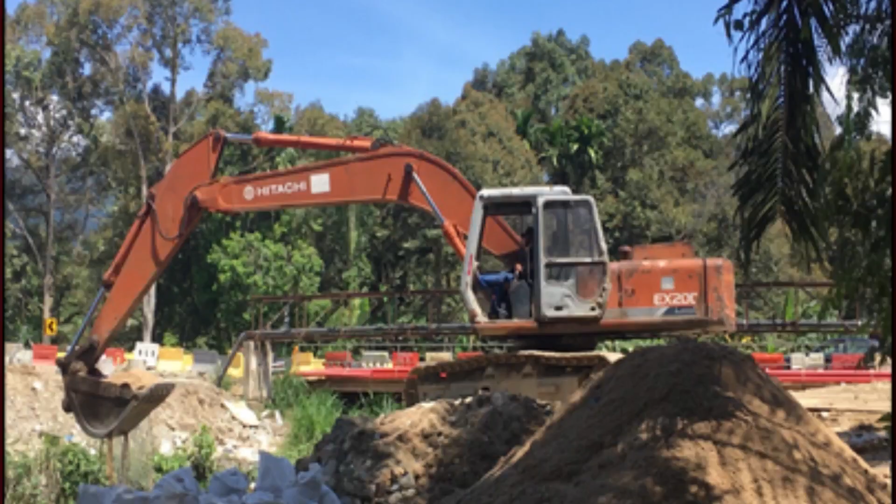The current project is membina jambatan baru merentasi Sungai Korbu ke Kampung Kenang dan lain-lain kerja berkaitan di daerah Sungai Siput Perak. Okay, let's go to weekly summary.

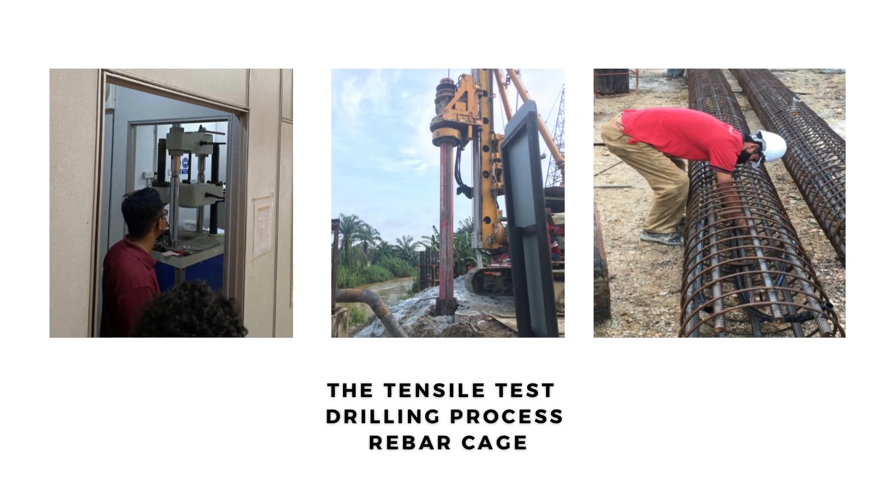First, we have the tensile test for steel. This test helps to determine tensile strength, yield strength, ductility, and reduction of area. This test is one of the most common tests for steel in order to follow the specification of steel from the JKR.

Then, the construction is undergoing the bored pile stage, which is the drilling process. This process will take 2 or 3 days to finish. After finishing this process, we install the permanent casing. After we install the permanent casing, we install the rebar cage into the 30-meter drill hole. We also install the pipe of the sonic logging test and also the Y-jack test at the rebar cage.

After all is done, we will do the concreting part. When the concrete mixer truck arrives, a slump test is made at the site in order to measure the consistency of fresh concrete before it sets. This slump test must be shown between 125 mm to 175 mm.

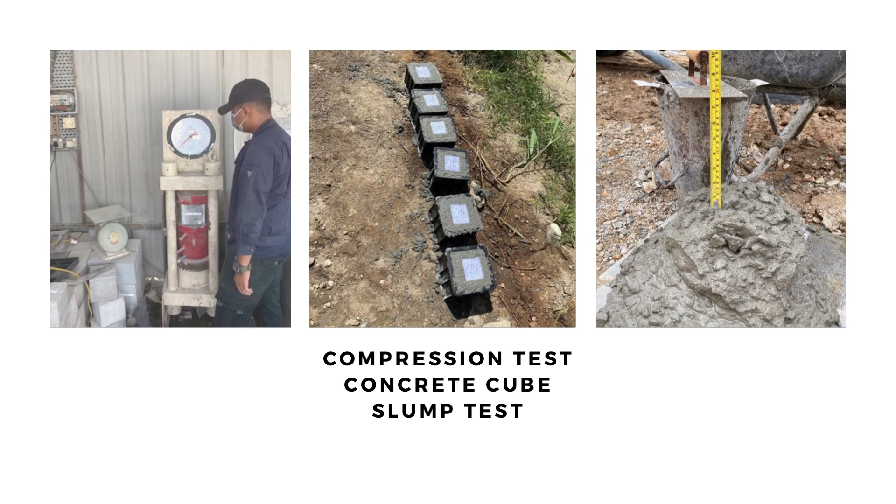After that, we will do the concrete cube for compression test. We will perform a test at 7 days and 28 days in order to make sure the concrete achieves the requirement needed. After 28 days of concreting the bored pile, we will do 3 tests on the bored pile. First, the Y-jack test being operated.

Usually for the pile load test, they will use the maintained load test, MLT, but for this project, we will use the bidirectional pile load test, which is known as the Y-jack test. Preparation for the test takes 2 hours before we can start the test. The duration for this test is 25 hours. In this test, we had installed 2 jack machines in the bored pile, which are at the top and toe of pile.

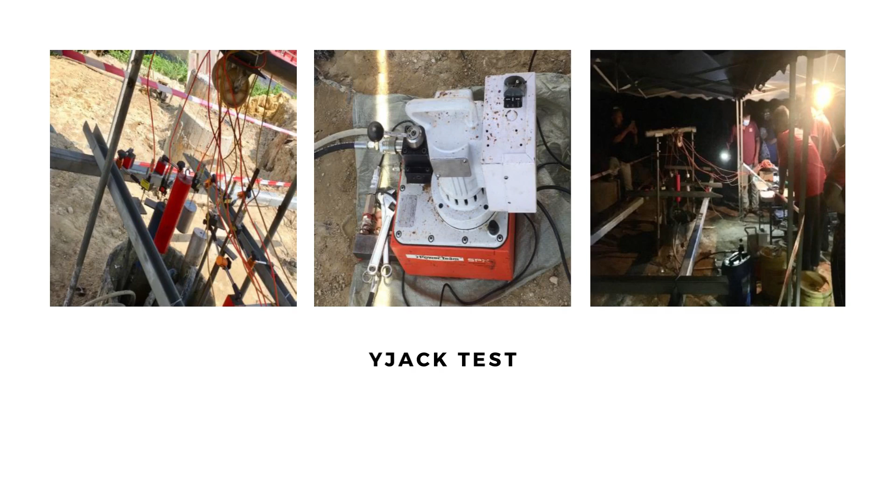After the Y-jack test is done, the sonic logging test is conducted. The sonic logging test is the most accurate and reliable technique for assessing the integrity of deep foundation elements, such as newly placed concrete drill shafts and slurry walls, particularly when drilling below groundwater level. The purpose of this test is to determine the quality of concrete for deep piles and identify the defect location based on ultrasonic pulse velocity.

The advantage of the sonic logging test: it determines the size, shape, severity, nature and location of anomalies in the concrete foundation. Multiple defects are identified and located. The method is quick and safe. It can be performed within 5 minutes.

After the sonic logging test, we will do the pile driving analyzer (PDA) test for both piles. The dynamic load testing using pile driving analyzer equipment is a high-strain, non-destructive load test method. This test can be performed during or after pile installation using conventional pile driving equipment. The purpose of this test is to assess the capacity of several piles in a single day. It is also to determine the strength of the pile.

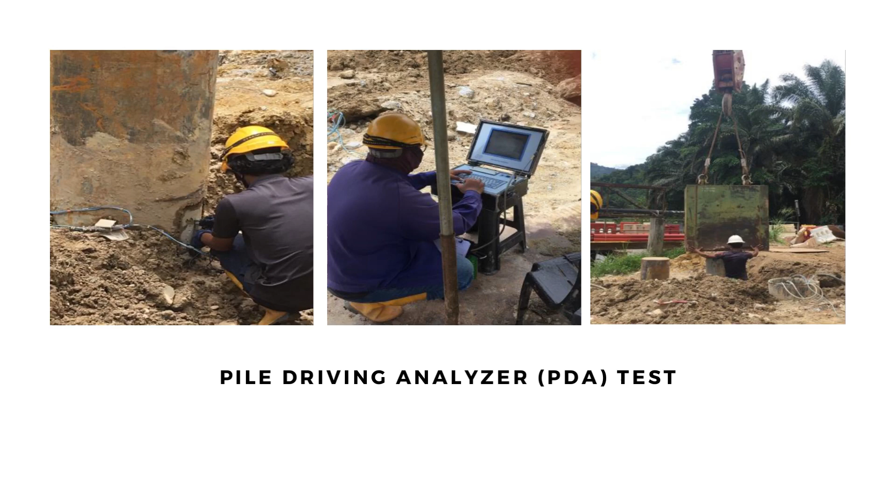Next, we have the bar cutting and bar bending work. They use the bar cutting machine and the bar bending machine to cut and bend the bar reinforcement. As for today, they were cutting and bending the bar. These bars were made for the bar reinforcement at the abutment.

Then they prepare the formwork. Formwork is the process of creating a temporary mold into which concrete is poured and formed. There are many types of formwork. So, for this project, they use traditional timber formwork.

The formwork is built on site out of timber and plywood, size 2x3. It is easy to produce on site. The disadvantage is that it is time consuming for larger structures, and the other disadvantage is that the plywood facing has a relatively short lifespan.

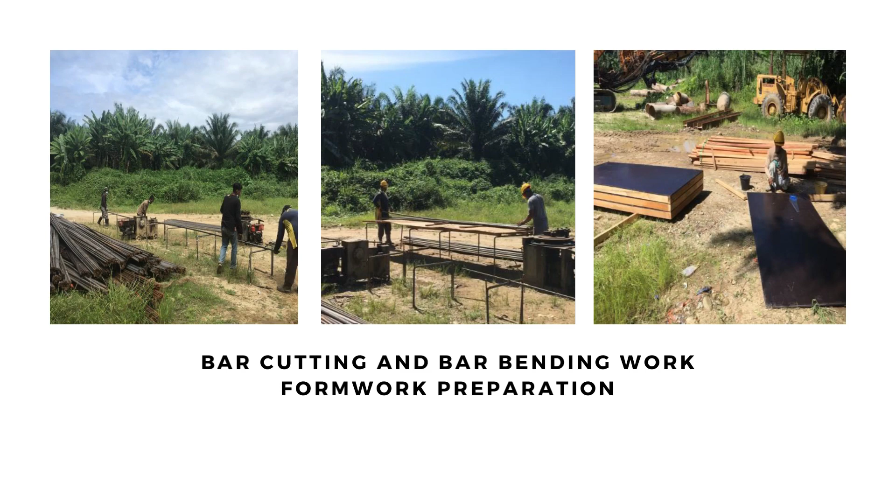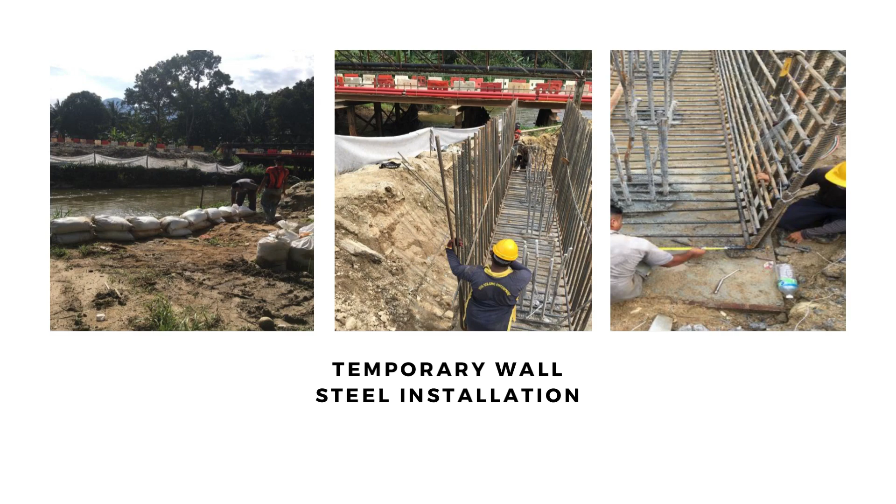Last but not least, they continue the installation of steel for the abutment. By following the drawing, they install the steel for the abutment before concreting the abutment.

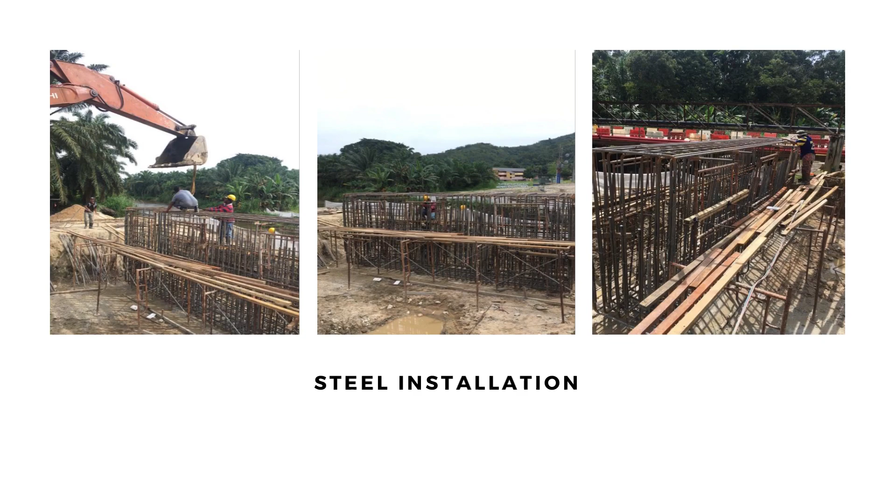Safety is very important in the construction of a bridge. In our country, there are many rules that must be applied at site to make sure the number of accidents during construction can be reduced. The workers always wear gloves, safety boots and safety helmets during construction. They also wear goggles when cutting steel or wood.

For now, with the pandemic situation, there are many SOPs at their site in order to make sure there are no new clusters from our site. All the workers and staff must be fully vaccinated or at least partially vaccinated before they work at site. Every day they check in with MySejahtera and check their body temperature before entering the site. They also always wear face masks. Every week, they sanitize the site office. All these steps are to prevent COVID-19 at our site.

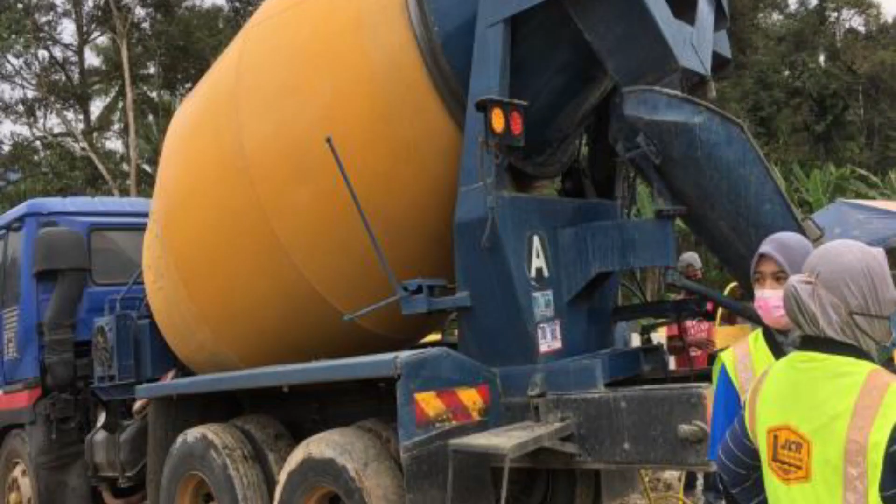For the conclusion, throughout my industrial training at Serasi Venture Sdn Bhd, I learned many things that required my skill to understand more. This program brought the actual site situation to me: how, as an engineer, to handle problems in a project, such as materials not arriving on time.

I learned how to calculate the bill of quantities, the real situation at site, and the plan and design of a bridge. I also learned how to deal with the client, workers and subcontractors at site. The experience I got made me understand more of what I learned in class, and I can prepare myself to face the working world after graduating.